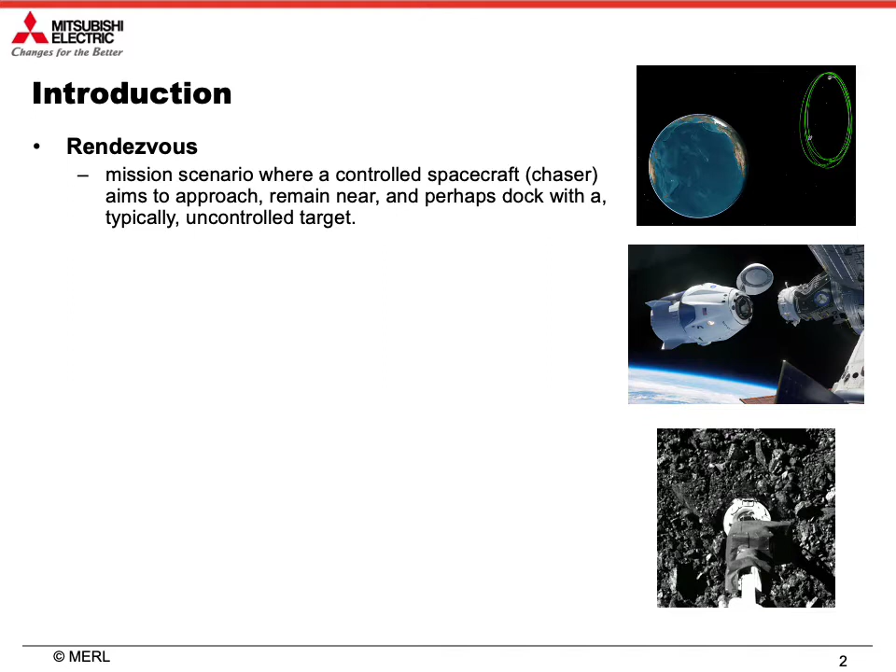So rendezvous involves a controlled spacecraft called the chaser, which aims to approach and remain near a target body. This often represents another satellite or something like a natural asteroid or a comet. It's important for several reasons, but the case study of interest in this paper is motivated by future human spaceflight. There will be a manned space station located on a near rectilinear halo orbit, as shown in the top right over here in green. Here's the moon, here's the station, and here's the Earth.

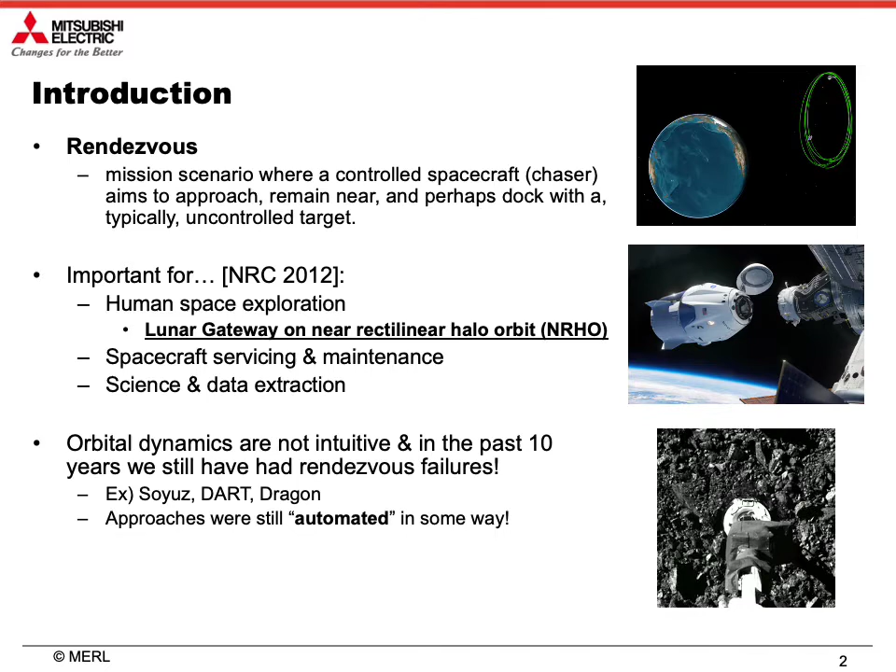This station on NRHO, called the Lunar Gateway, will serve as a stopping point for manned space missions to the lunar surface or into deeper space. Moreover, this still remains a hard problem. Orbit dynamics are not that intuitive, and in the last 10 years, we've still had rendezvous failures despite the use of automatic approaches. So if we're trying to do this autonomously, it's going to be even harder. And since we anticipate more complex missions in the future, it's important to develop a framework or system that can handle safe rendezvous autonomously and robustly.

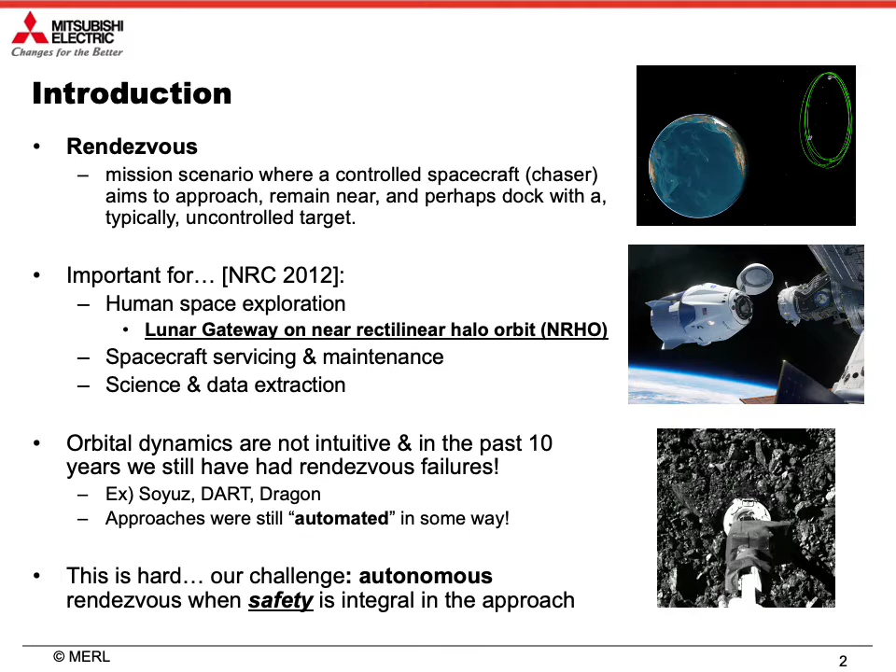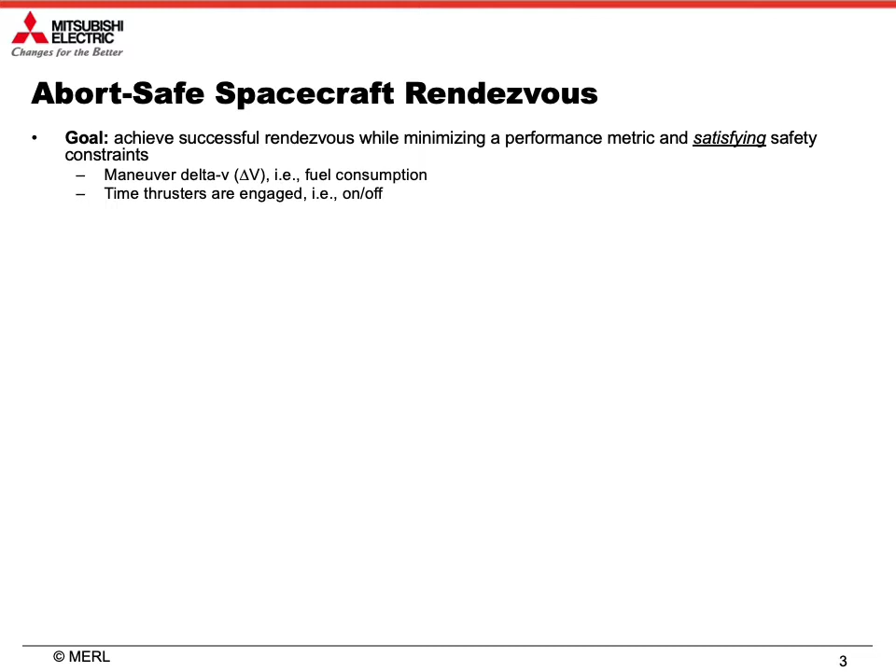The goal in abort-safe rendezvous is to minimize the performance metric while satisfying the safety constraints. That performance metric might be maneuver delta V, which is a proxy for fuel consumption, or thruster on time. We want to reduce the amount of time that thrusters are on to reduce the risk of thrusters getting stuck in an on position, and also such that less loads are imparted on onboard instrumentation. The safety we're concerned with is such that even if you had a partial or total loss of propulsive capability, there would at least exist one passive or active abort maneuver that allows the vehicle to avoid collision with the

target. In practice, solutions are typically automatic in the sense that a vehicle will follow a pre-written set of commands like a script. Such methods however, are not flexible in general and will work for a limited set of approaches and missions. Also, these techniques are not autonomous, which may be required for complex or deep space missions and for scalability as rendezvous becomes more commonplace.

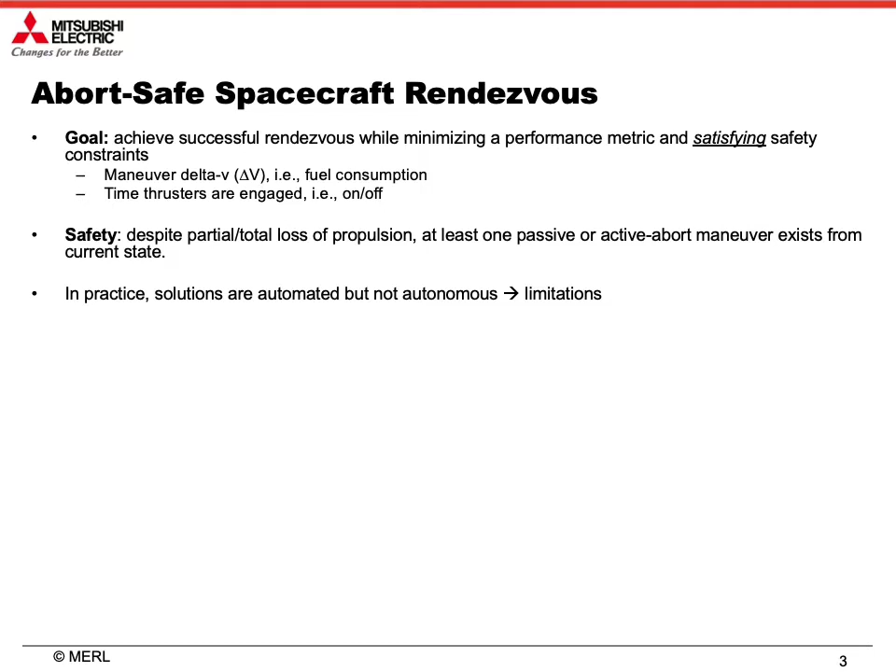Now, rendezvous is typically split up into two approaches. The initial approach is concerned with passive safety, where we want to ensure that the chaser is not at a state where natural dynamics would lead to eventual collision with the target. And as the chaser gets closer to the target, the final approach begins where we want to maintain active safety, where we need to be able to show that at the current chaser state, at least one powered abort maneuver would exist. Now, our prior work dealt with both of these safety aspects and generalized some of the prior research.

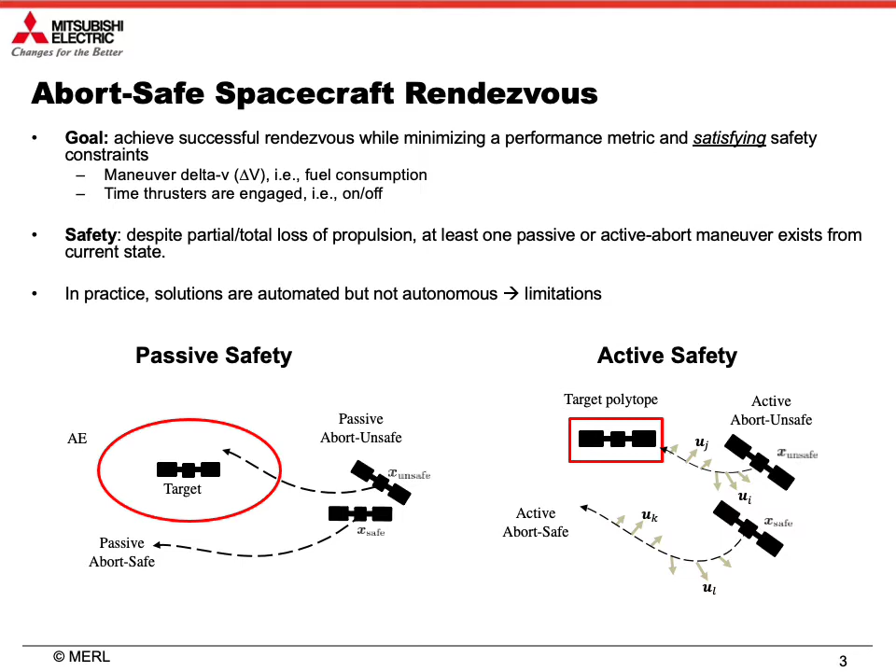Research in this area has obviously been studied. However, these methods generally offload the entire problem to the solver, and they require solving a large optimization problem. In our approach, we use reachability theory to determine what are the unsafe regions of state space, kind of illustrated by this region right there. And then we use local convex constraints in the online MPC formulation to separate the current chaser spacecraft from the unsafe regions of state space, thereby remaining safe and ensuring that at least one passive or active abort maneuver would exist. We demonstrated this concept on our Earth orbiting spacecraft in our ACC and CDC 2020 papers.

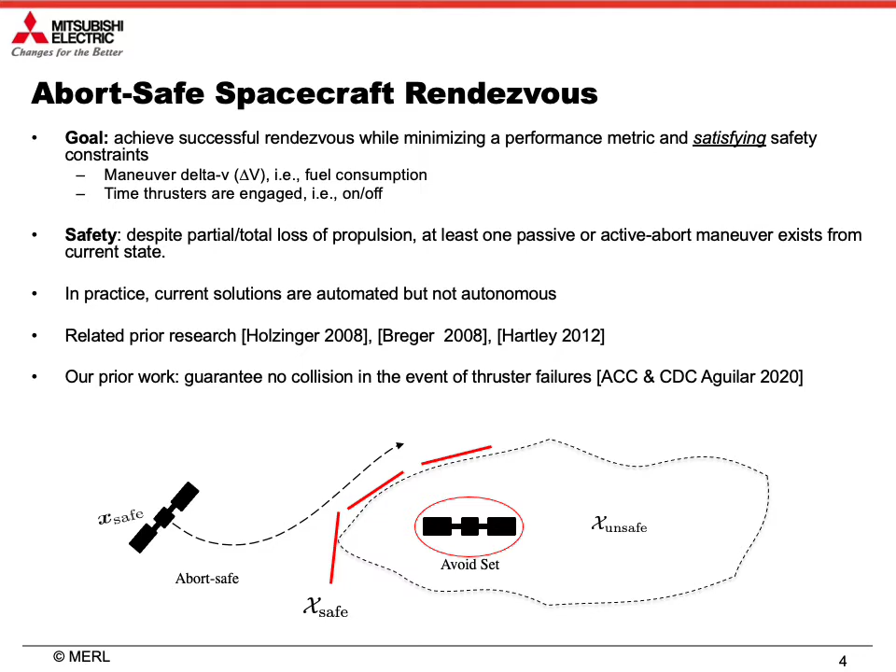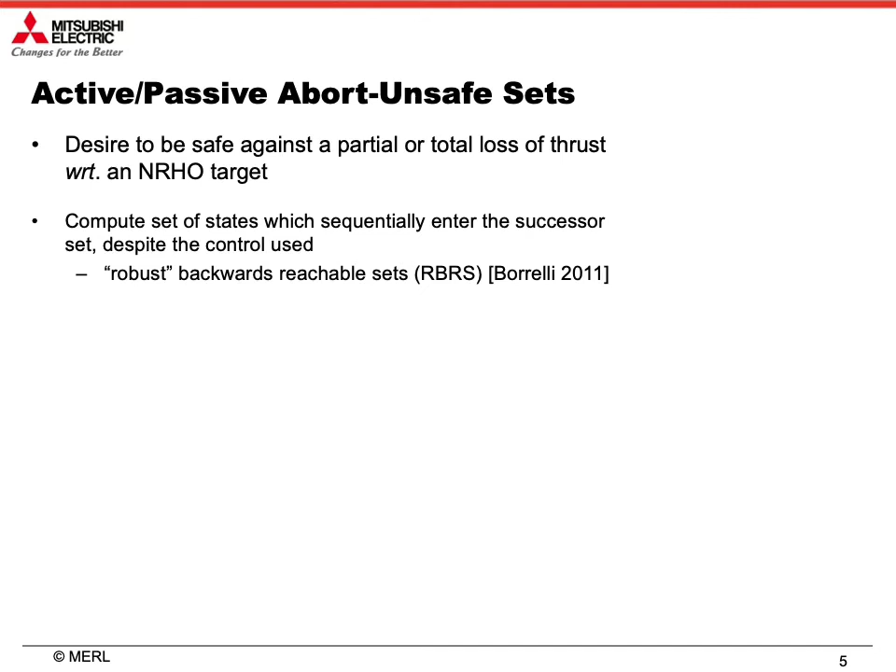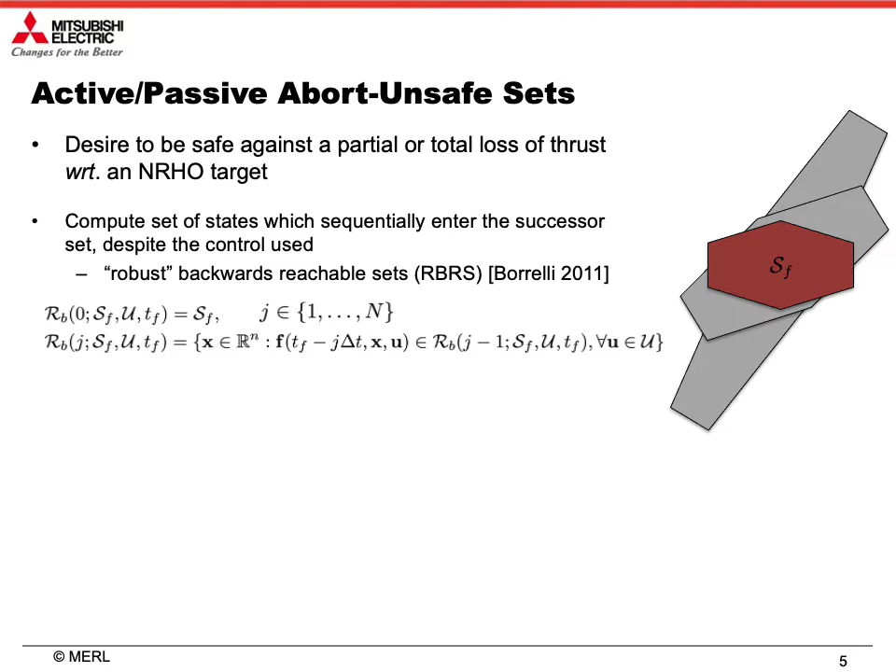We compute these sets through the backwards recursion. For example, this new gray set represents the set of states that would enter that target set no matter the control used in one time step. Here we have the set of states that enter that successor set no matter the control used, and you keep working backwards for some safety horizon of interest.

If you take the union of all of these guys on the right, you would end up having the set of states that fail at a specific final time. However, we have to recall that the relative dynamics are LTV, and they change with time as the target is in different parts of its nominal trajectory. Therefore, we must take a union across variable final times to maintain safety with respect to this LTV system, as shown by this equation over here.

Then lastly, if we're considering various failure modes, we must take another union across these control sets as shown over here on the bottom right. Naturally, the number of sets in this union can in general be quite large. And when that control set over here is empty, we obtain the set of passively unsafe states.

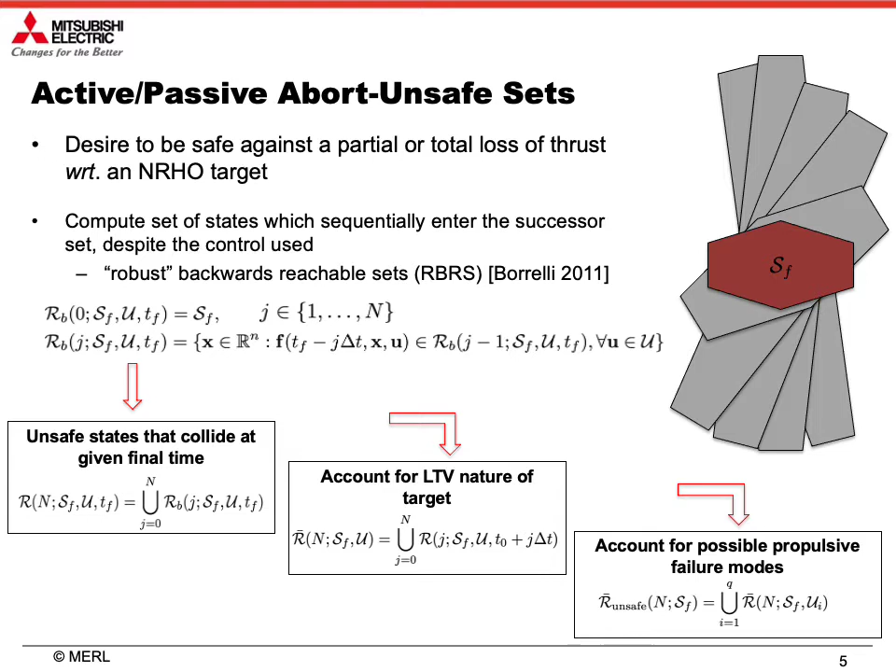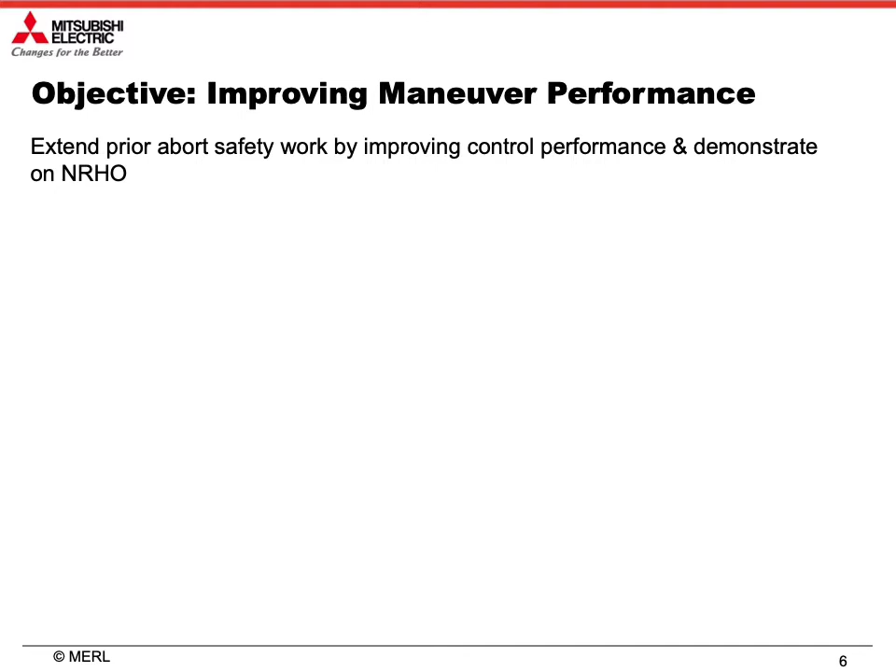In our prior work, we used MPC to avoid the unsafe regions of state space. But MPC doesn't generate realistic control signals since many times thrusters can't just use continuous controls and we need to reduce the time that thrusters are actually on. So in this paper, we had a couple of goals. The first is to improve fuel efficiency and reduce the amount of times that thrusters are on. And also, we wanted to demonstrate this on NRHO because of future mission concepts.

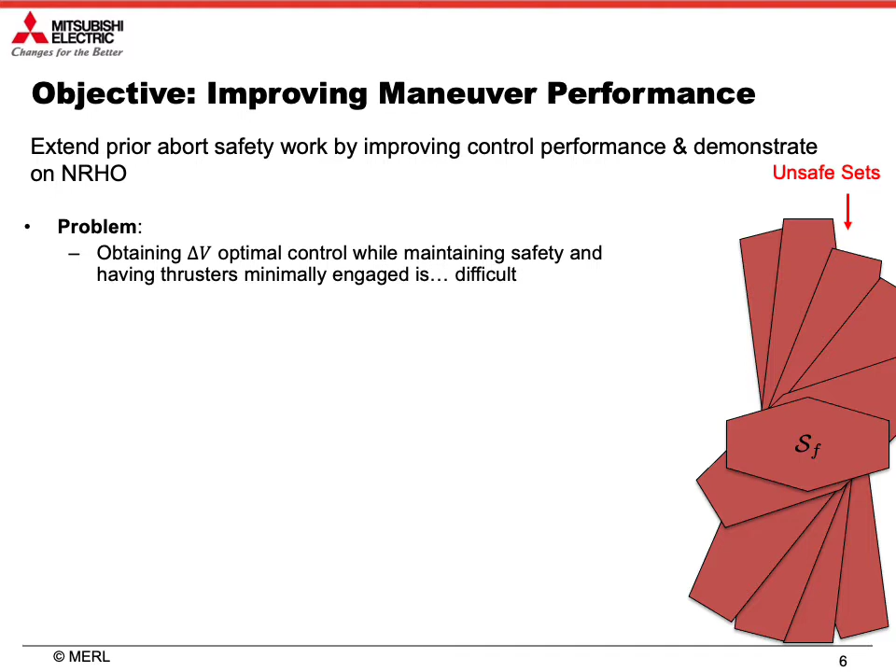Now, ideally, we would solve the safe ΔV optimal control problem while trying to reduce the thruster on time, but this is quite challenging. In fact, reducing thruster on time would generally require adding integer decision variables, which quickly becomes intractable for online implementation. So how do we do this? Well, we tried a few approaches, but we realized we were sitting on top of a convenient solution the whole time. We can leverage the passive backwards reachable sets from our prior work.

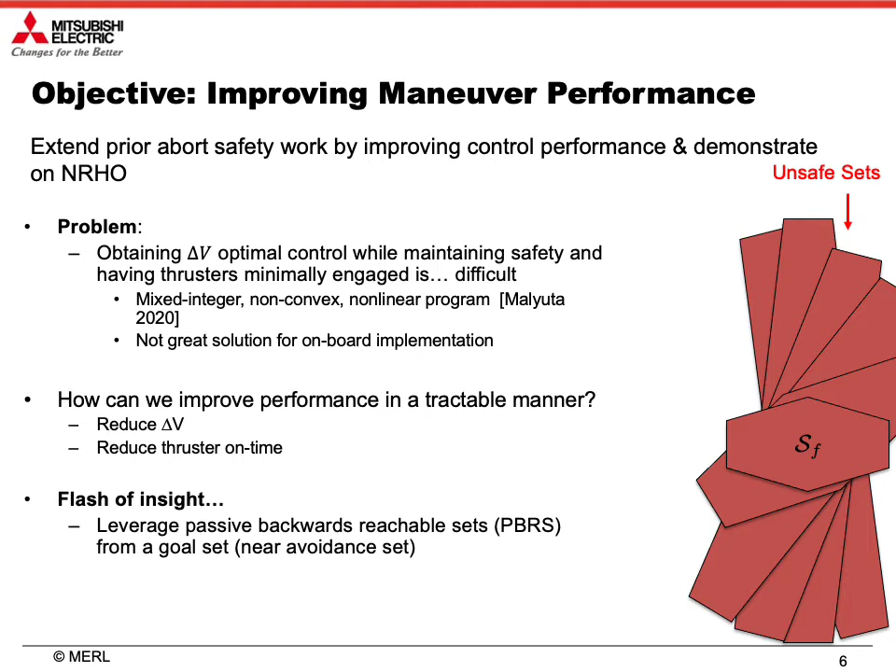In fact, we can define a goal set, shown here in blue in G subscript F, and compute the passive backwards reachable sets from this guy. And we call these sets the coasting sets. Then the goal would be to steer the chaser into the blue sets in some way while avoiding the red portions of state space, such that once you enter these blue sets, you can just naturally coast and drift into the desired goal set, thereby doing a hopefully fuel efficient and also a rendezvous that uses the thrusters less often. So we'd be exploiting natural dynamics better, and we'd be satisfying both of our goals.

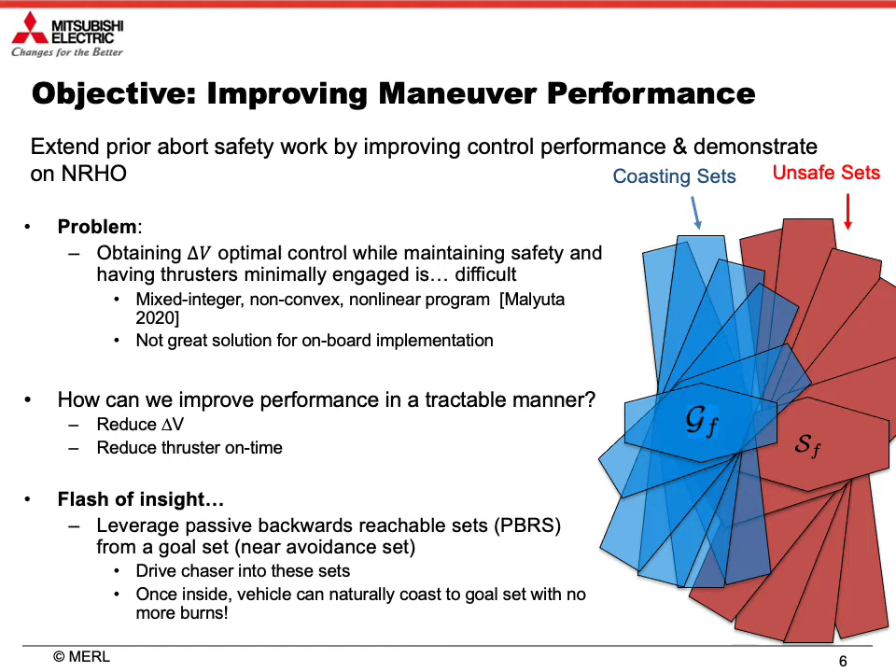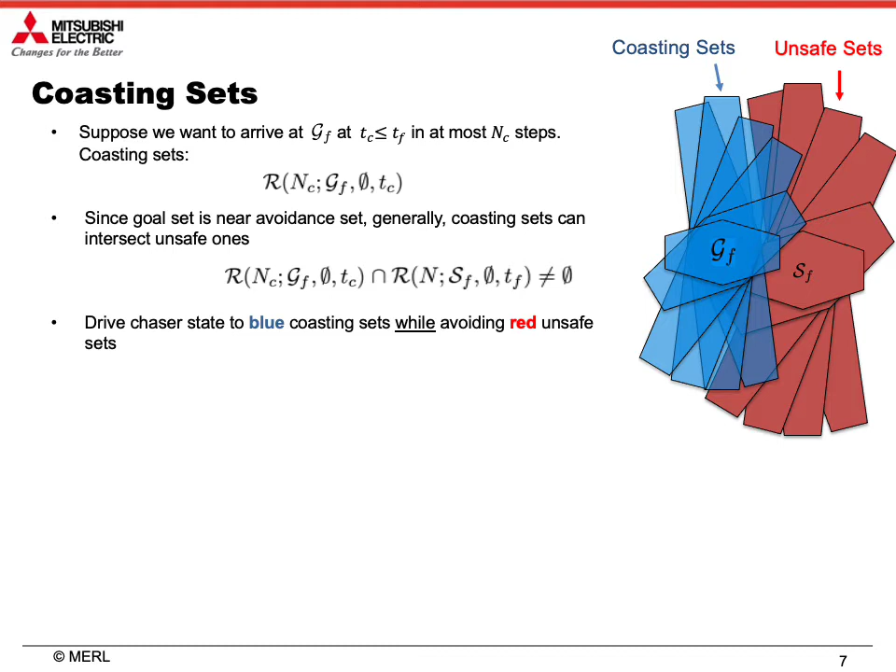So we first specify the time at which we want to arrive, or the maximum number of steps we want to coast. We use our prior passive backwards reachable sets to construct the coasting sets. Generally speaking, the coasting sets and the unsafe sets are going to have a non-empty intersection. This means you can coast into the goal set first, and then you could passively drift into the target set after, or vice versa. In this work, we use MPC to drive the chaser into the set difference of these guys, but without explicitly computing that set difference.

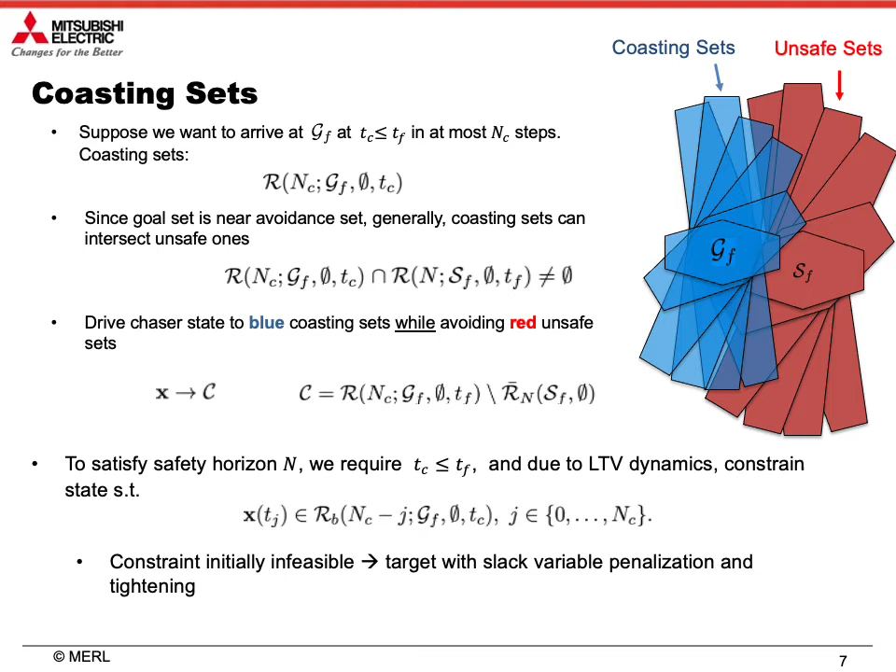Now, since we have an LTV system, we just have to be careful about which coasting set we are targeting at each moment in time, and this is handled through this constraint. If you don't target the right coasting set, you might enter the goal set at the wrong time, or you may not even enter it at all. And then naturally, the constraints are initially infeasible, and thus we can use slack variable penalization as well as constraint tightening to drive the chaser into the coasting sets.

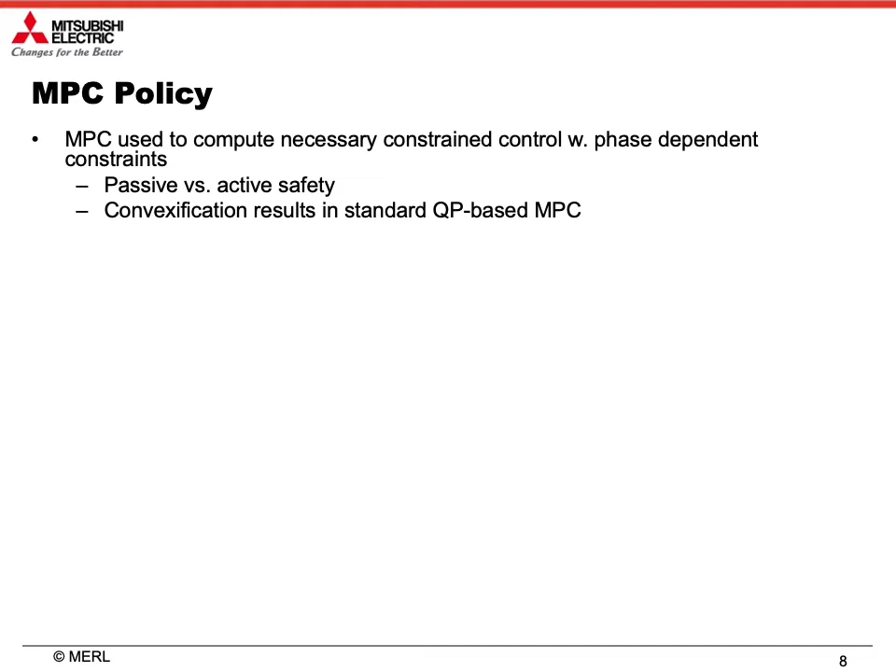So now we're actually in a good spot. With our coasting method, MPC can give us good thruster behavior while maintaining safety. We see here the standard stage and terminal costs, which are also functions of a slack variable. These are going to be used to soften those coasting constraints I talked about earlier. The constraint function G will include those coasting constraints, as well as all of the convexified safety constraints such that the chaser is separated from the unsafe sets. In our sims, this function depends only on the mission phase.

In our results, we only tried coasting in the initial approach, as shown over here, where passive safety is required. As such, during this phase, if the chaser is not inside of the right coasting set, the standard safe MPC solution is used, right over here. If it is, the control is turned off. After coasting to the goal set, the final phase begins where active abort safety is maintained. We incorporated a line of sight constraint in this paper as well and use a standard safe MPC solution.

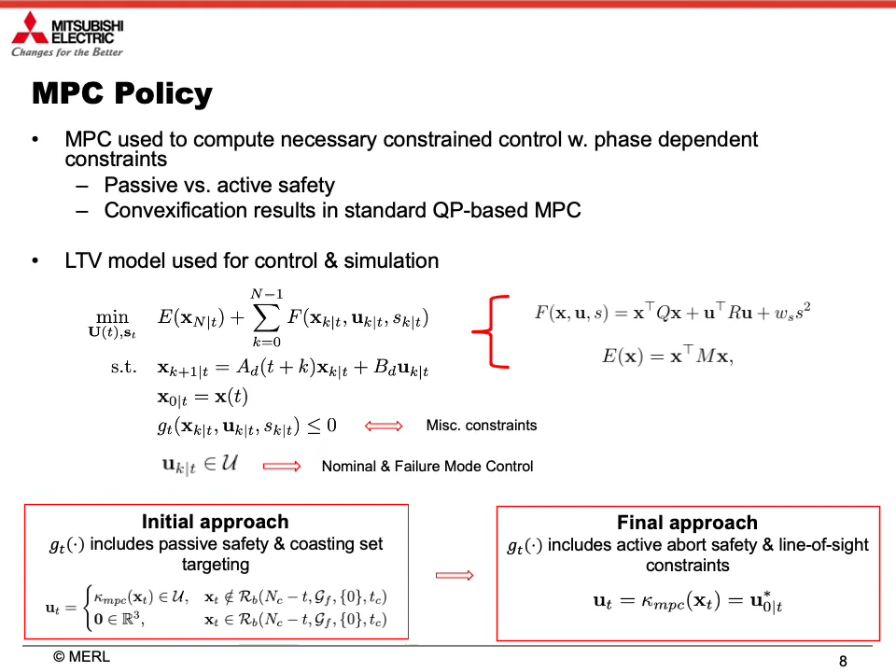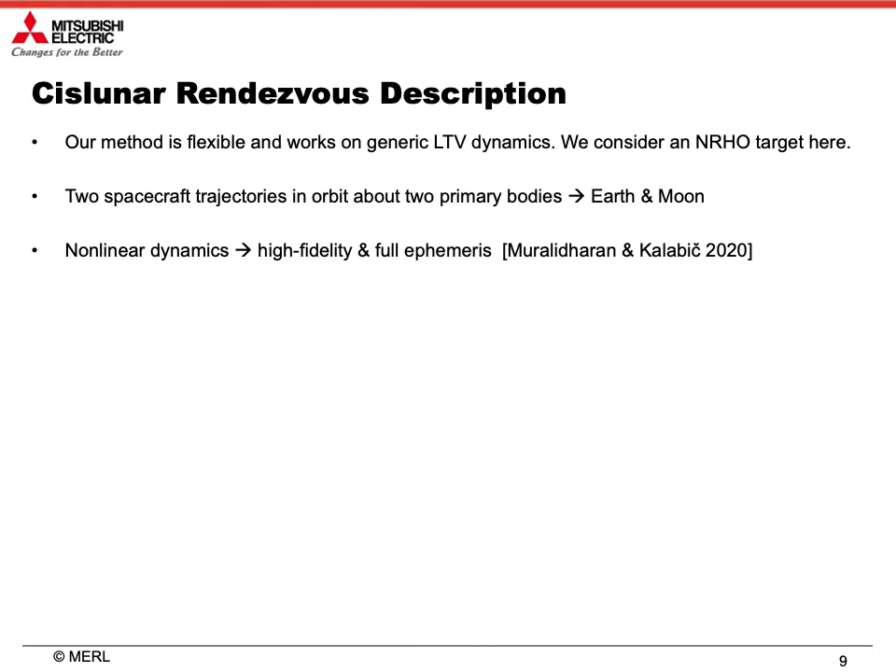Our method is flexible, and in this paper we show results for a realistic NRHO target. Both the target and the chaser are in orbit in the Earth-Moon system. Our dynamics model is a high-fidelity, full ephemeris one, meaning we're taking into account all dominant perturbations.

In this figure, we show the geometry at hand. We have an inertial frame centered at the Earth-Moon system barycenter right over here, depicted by the black arrows. We also have a synodic frame, which rotates with the line connecting the Earth and the Moon, shown here by the red arrows.

We can clearly see the chaser's position, the target's position vector, as well as the relative position of the chaser with respect to the target.

Our aim here is to drive that relative position vector to 0 while maintaining safety and leveraging the coasting sets.

I also want to quickly show you what a family of southern L2 halo orbits look like, as shown over here. The Moon is clearly visible in the middle. As you can see, they're kind of funky.

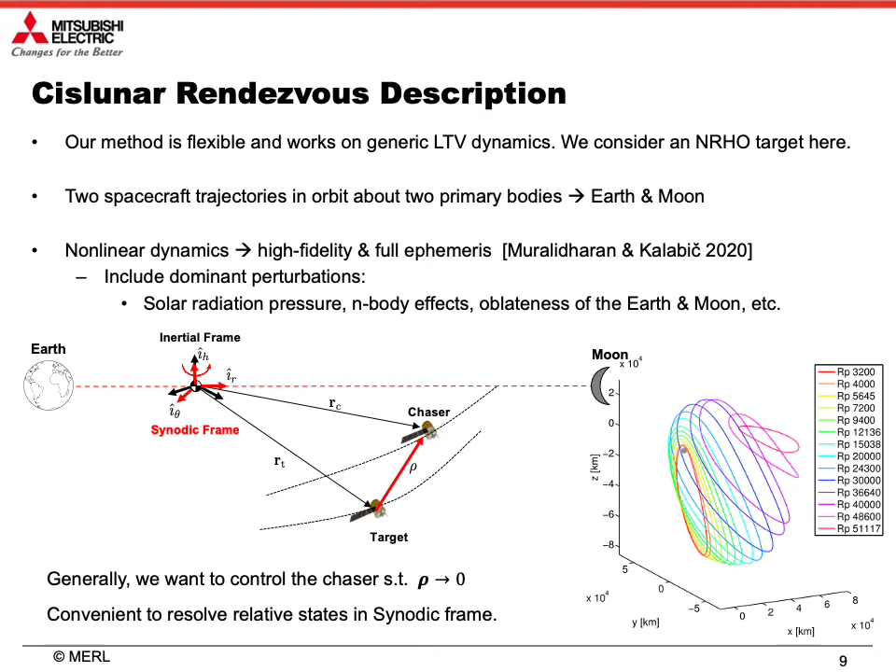Now I'll show you some results for the mission scenario considered.

Here we show the results of the coasting algorithm for an approach at Perilune, which is the closest point of the NRHO to the Moon. We've set the coasting duration to be 6 hours long, given the initial time.

And here on the left, in blue, is the new solution with the coasting arc. We can see that the coasting arc is indeed almost 6 hours long by looking at the plot on the right, where we see that for the most part, the control is 0 in the 6-hour window.

And when we zoom in, only 2 burns were required to enter the coasting set, and from then on we just drift naturally, following this blue trajectory until we enter this green goal set.

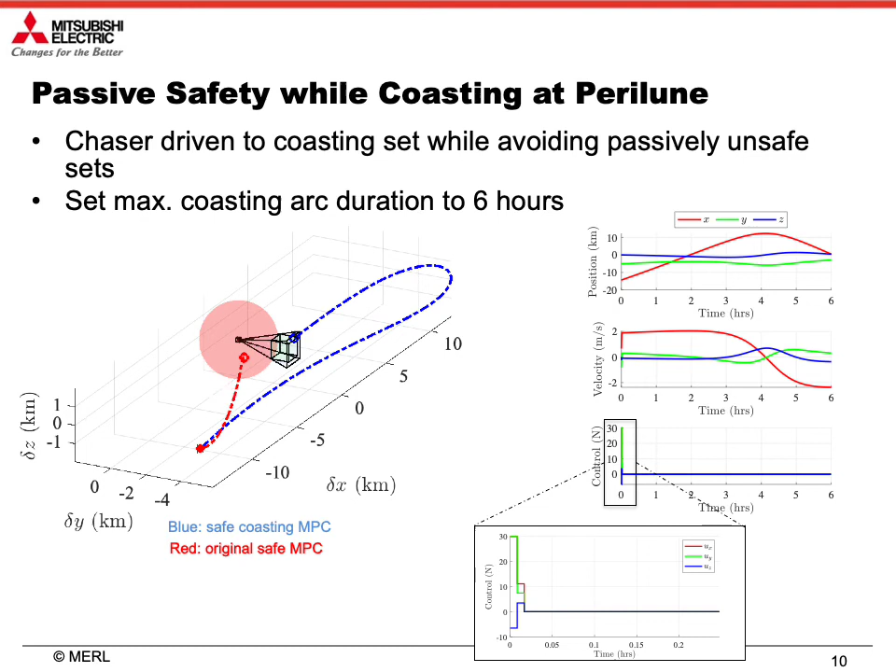In red over here, for comparison, we show the original safe MPC solution from our prior work. So both methods are obviously safe.

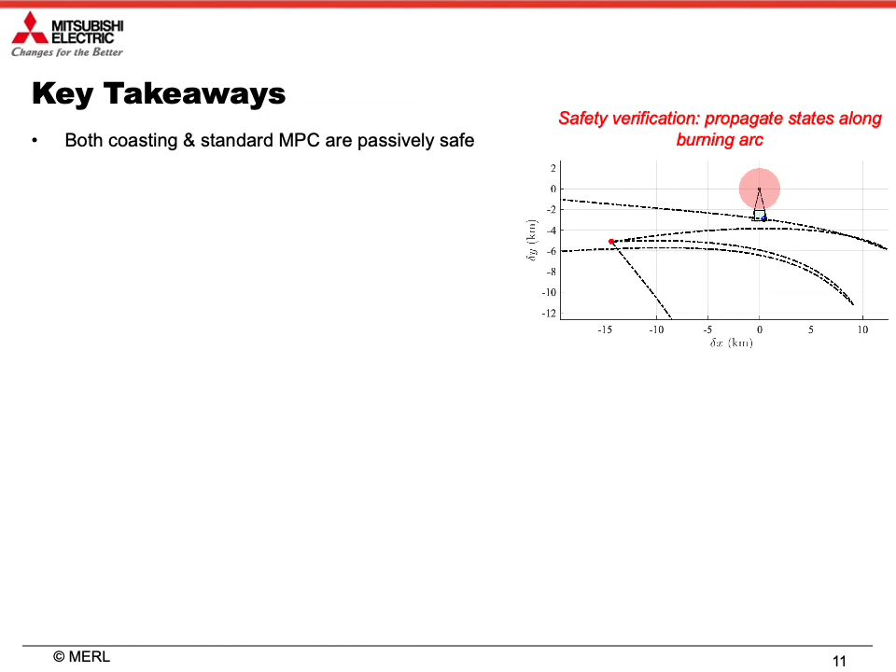Now, though the coasting MPC uses larger burns, as we can see from the bottom two plots, since only 2 burns are used before switching phases, the delta-v savings during the initial approach are significant. For the same prediction horizon, the coasting algorithm is much more efficient as it exploits natural dynamics more.

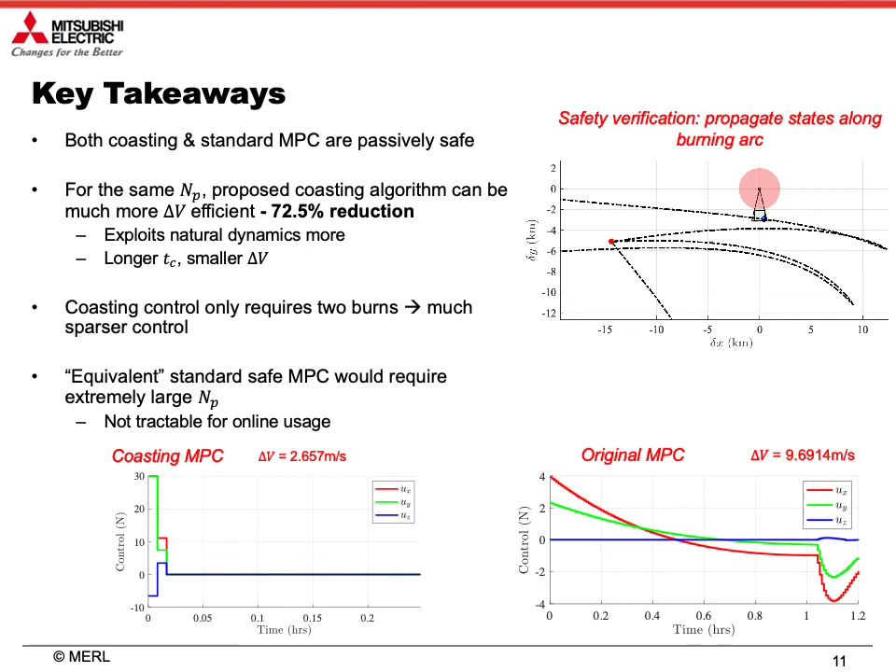Now lastly, for a standard safe MPC solution to yield similar behavior as what we see with the coasting sets, we would need an enormous prediction horizon, which simply is not tractable for online usage.

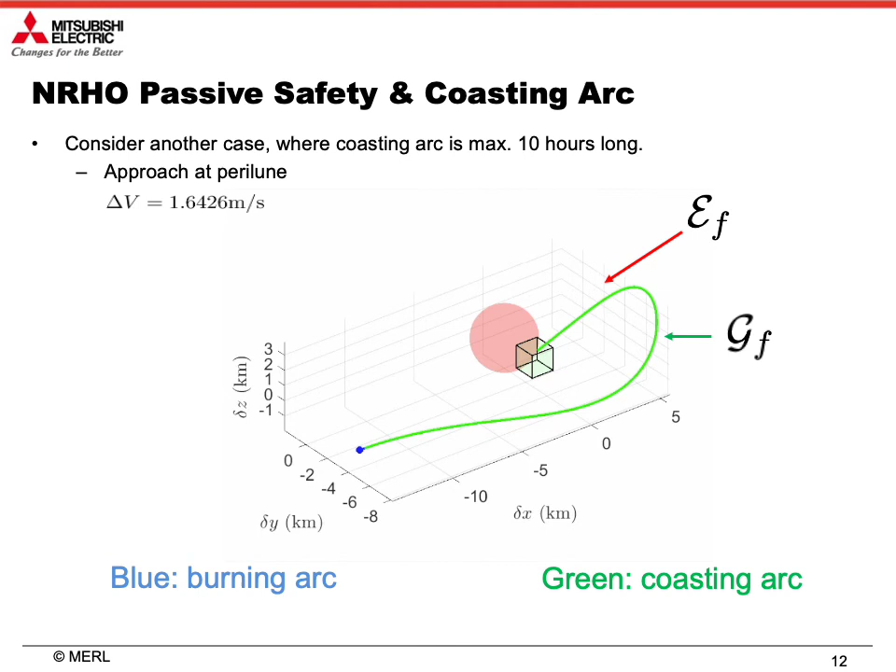Here we show another example at perilune, but where the coasting arc is now 10 hours long. The burning arc portion is shown in blue, while the coasting arc is shown in green. Again, the delta-v is very small for this maneuver.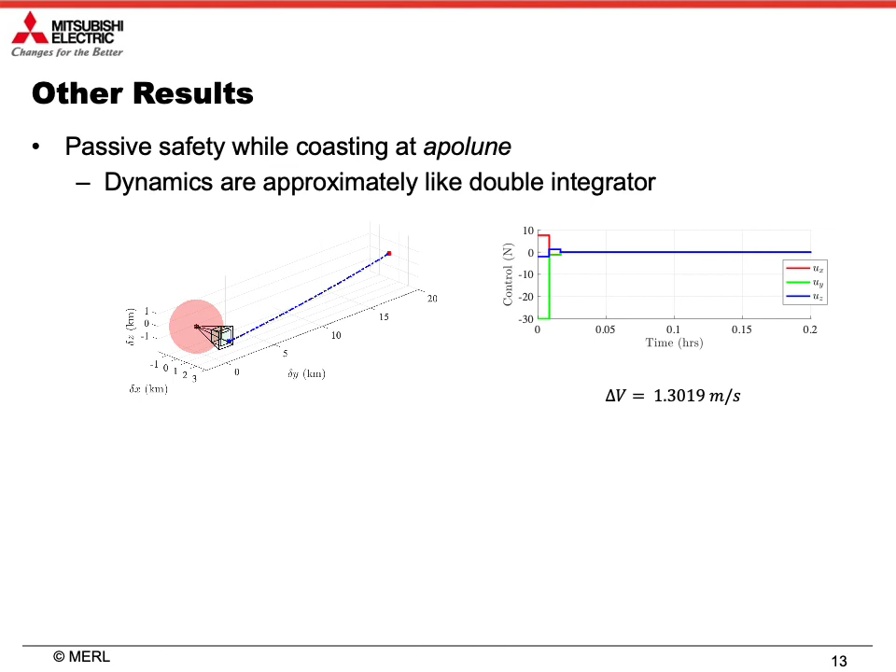Now, once we enter the goal set, the active safety portion starts. And here, we're simulating a case where the only available control after the failure time would be given by these constraints on the left. The failure mode is notable because there is no braking maneuver that can be made when

looking at our initial condition, which is right here, and we're trying to move in the positive y direction. However, the chaser can't slow down along the y-axis. Hence, at the failure time, which is right here and right here, a z-directional burn must be engaged to avoid a collision.

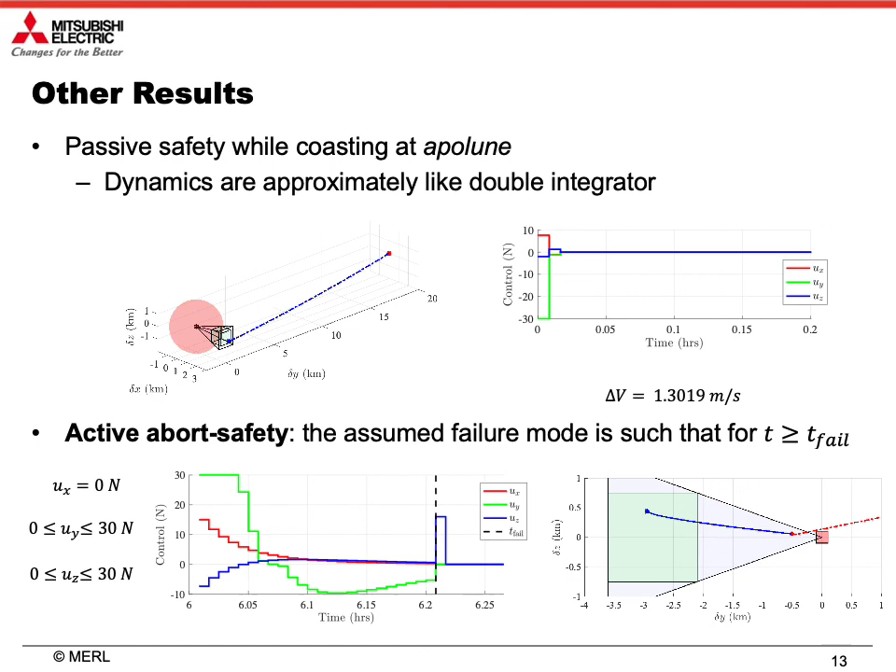It should be noted that none of these maneuvers are pre-planned. The MPC found them since the chaser was in the safe region of state space.

So in conclusion, we developed a fuel-efficient and fail-safe control policy for Rendezvous on generic time-varying orbits. We targeted and exploited coasting sets, which allowed us to reduce fuel consumption and thruster on time.

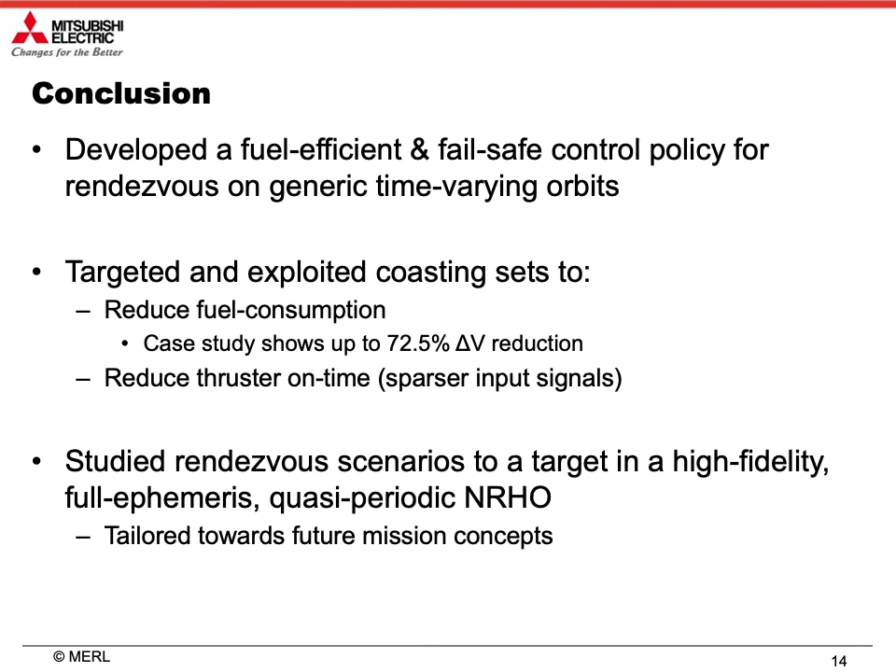And finally, we studied Rendezvous scenarios that were safe for a target in a high-fidelity, full ephemeris, and quasi-periodic NRHO.